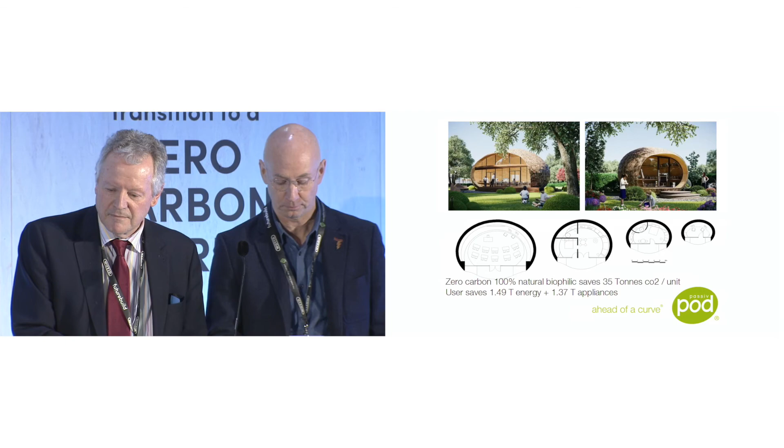Passive Pod will be manufactured off-site with a modular structure inspired by nature's hexagonal beehive shape. The structural modules will be formed from short rectilinear timber components, clad and insulated in the factory.

Automated factory efficiencies reduce waste and improve build quality for rapid delivery and erection. A cradle-to-cradle approach allows all the components to be reused or recycled at the end of their design life.

Laminated timber is fire retardant, more resilient, and lower maintenance than traditional materials, and our fabricators apply ISO standards and have BOPAS accreditation for mortgageability.

Our three markets are driven by demographic growth. Millions of home workers need space which is secure, kiddie-proof, and easy to install. Our retirement population and eco-tourists want high-quality eco-lodges using natural materials, harmonious with rural landscapes.

17,000 schools and colleges have committed in the UK to a national eco-schools programme. They need classrooms which would reduce current carbon dioxide by 30%, and biophilic design improves cognitive abilities in students by 20%. We have a supply chain in place with experienced off-site timber fabricators.

Our 6 multi-use designs use the same modular components. We can scale up via the new off-site MMC fabricators without new factory costs.

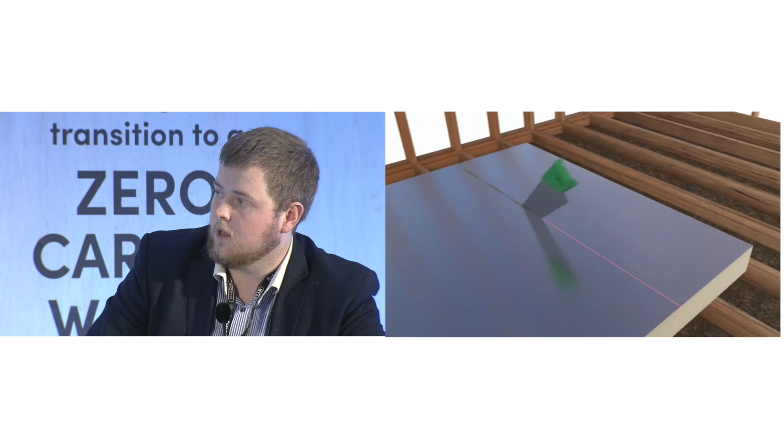So basically, you're going to measure your rafter stud as you typically would, but in this case you're going to cut it 8 to 10 millimeters smaller than the opening. Cut your board as you would, clean it off, then roll your Gapo tape along the cut edge and trim with your scissors — don't run with them while you're using them, health and safety and all that. You're going to do this for all 4 sides, and then that's it. Just strike along the edge.

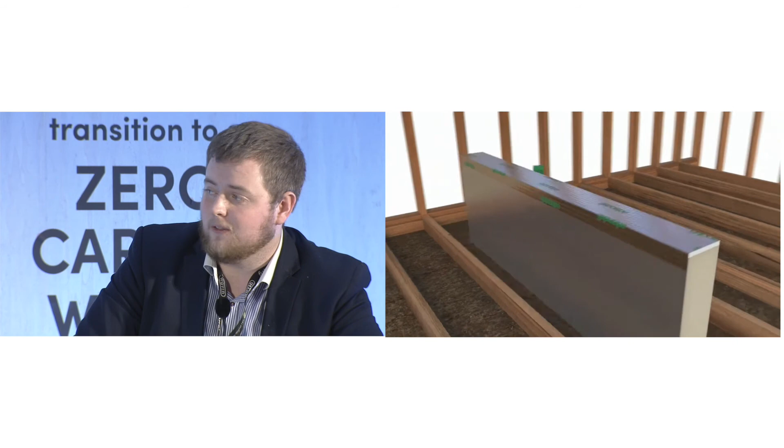Whenever you have this done, you can friction fit it between the rafter or stud, and it is constantly expanding and contracting to fill every micro gap to eradicate any air or heat loss. You do this on your floors, your walls, and your roofs. Now you may say, why would I do this on my floors, walls, and roofs? What's the advantage?

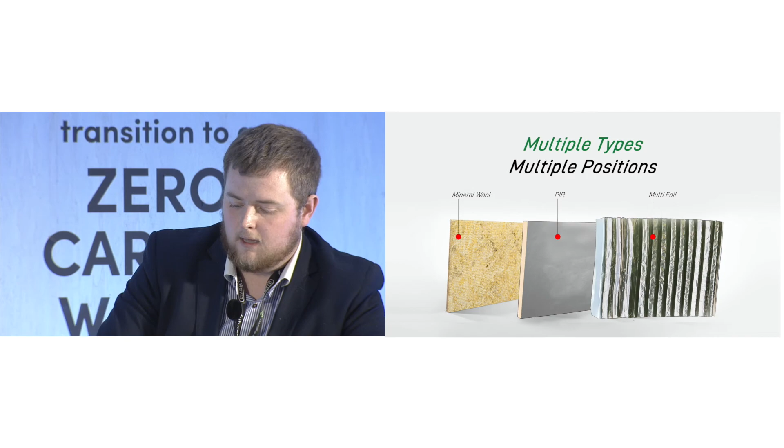In 2012, the BBA started doing what's called an Air Movement and Permeability report on insulation types — basically, a fancy way of saying in-situ tests on insulation. They did it with multiple types in multiple positions: PIR, mineral wool, multifoil, and what they found was that regardless of the insulation used, all insulation types systematically failed.

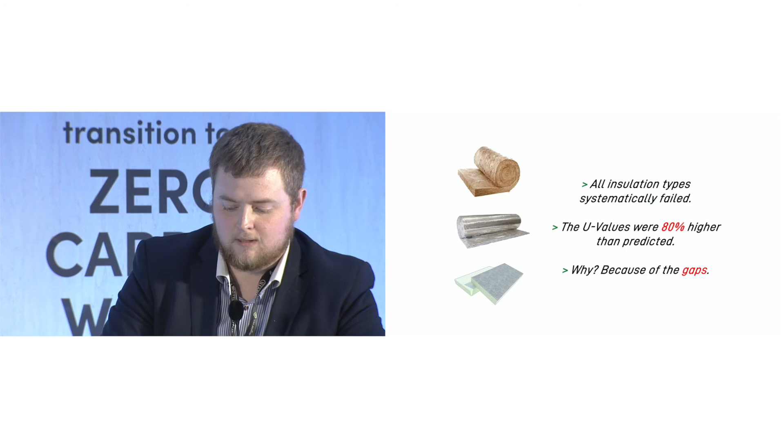The U values were 80% higher on average — 80%. Why? Because of the gaps. Now, whenever I say gaps to anybody, especially a builder, they think a gap is 1 to 5 millimeters. Air and heat, they need gaps so small our human eye can't see it, less than 1 millimeter. And once they find this, they redirect the entire flow and current of air and heat to maximize and take advantage of it.

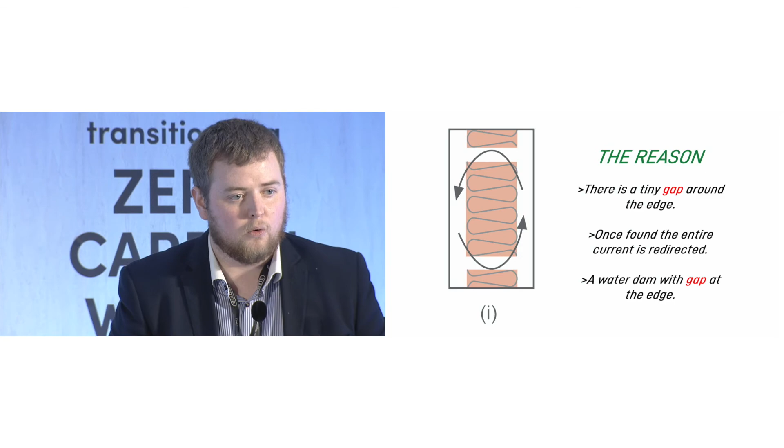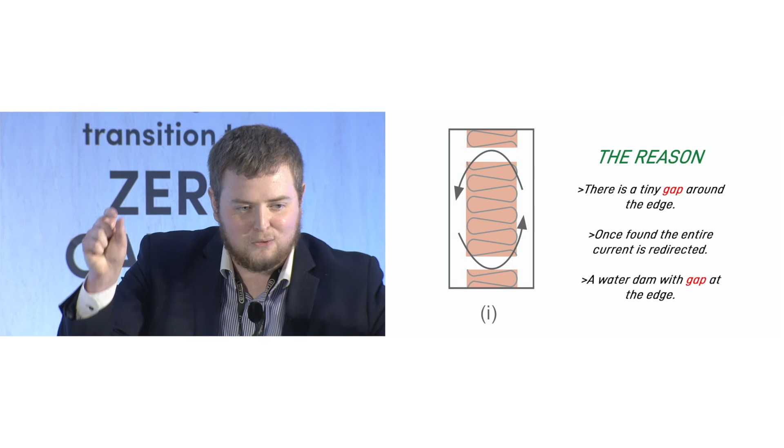The analogy I like to use is: imagine you lived beneath a water dam and the architect and builder said to you, don't worry, there's only the tiniest of tiny gaps around the edge. You wouldn't be long looking on Property Pal for somewhere else to move to.

So this is the end effect of this: the homeowner has to subsidise this 80% rise in U value. They have to take the money out of their pocket and allow it to slip between the gaps. It also has other nasty effects, such as releasing an extra ton of carbon into the air every 10 years, by conservative estimates.

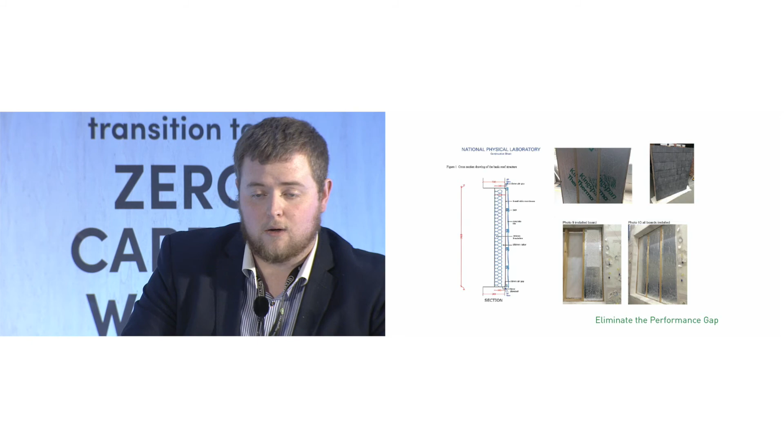So we went back to the BBA and the NPL and said, can we rerun the test — one with, one without our product — to see what impact it would have. Without us, it was the same as they found in 2012: 80% loss, the same as found by other accredited bodies across Europe.

With us, 0% loss. We 100% eradicated the difference between as-designed and as-built, and the performance gap was gone. So the reason this is particularly pertinent is that, as of June 2020, it's no longer 'do I address this issue' — it's 'how do I address this issue.'

There's now an entire annex on insulation gaps, and you have to work towards as-built U values and calculations. You have to swear by your primary energy use per square metre. You have new testing, and you have to take a photograph of every single piece of insulation you're putting in. So it's becoming ridiculously strict.

And there's £480 million worth of PIR sold every year. So a big issue in a big market is a big problem.

If you were to take a small 2-up, 2-down house, it's about £600 to £620 to install Gapo tape. That's £120 to £150 of savings per year. That's 4 years to pay it off, and approximately £4,000 saved over 30 years, which is a 530% yield on investment. The wee joke we like to say is that if Gapo tape was a stockbroker, he'd be the most popular man in London, you know.

Plus, when it comes to time and cost of install, people don't think about how long it actually takes to install insulation. You have to bevel it, you have to counterbat, and do all these things. With us, people tape them and take advantage of the 10 to 20 millimetre margin of error we give, and walk along and slide them in like jigsaw pieces. Then they get rid of all these hidden costs such as timber stop batten, spray foam, and metallic tape. In this particular job, we saved a guy £2,000 over 3 houses.

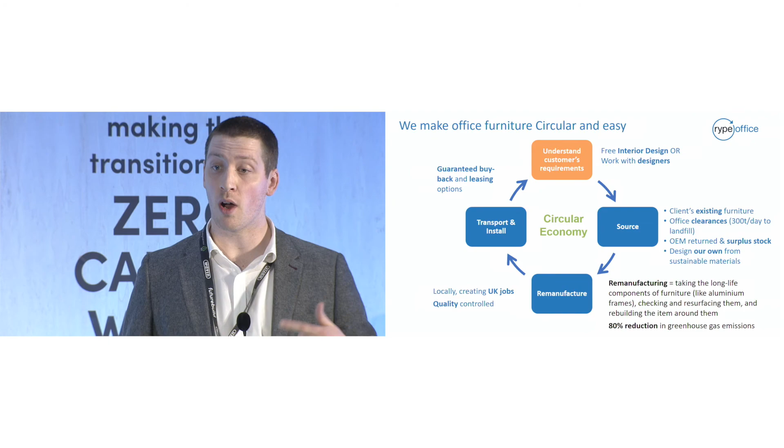We transport and install the furniture ourselves, and we sell it to the client with a guaranteed buyback. Instead of having to pay for it to have it cleared, we will pay you to have it back, because ultimately we know we can rework it and again feed it into our cycles.

So this is the point about cost advantages. When you remanufacture, when you use the circular economy, you have a structural cost advantage. This is because in our industry, one of the main advantages is that you don't have to pay a huge distributor margin. There's also the advantage of not having to pay material costs, because the input to our process is a waste source that people are paying to get rid of.

To summarize, the benefits of circular economy furniture are lower cost, great ergonomics, no cost of disposal, reduced waste to landfill, local employment for long-term unemployed and disabled people, and a real capability to deliver local social value. We also went one step further, because we didn't want to be known as the second-hand furniture guys. We designed furniture from waste materials.

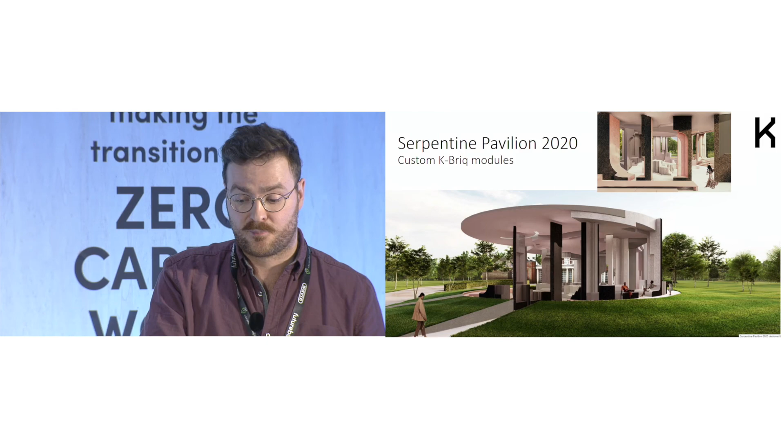Also, exciting news: we've been selected for the Serpentine Pavilion this year, so you'll be able to go and visit a custom K-Briq module project in Hyde Park, which is going to be open from late June.

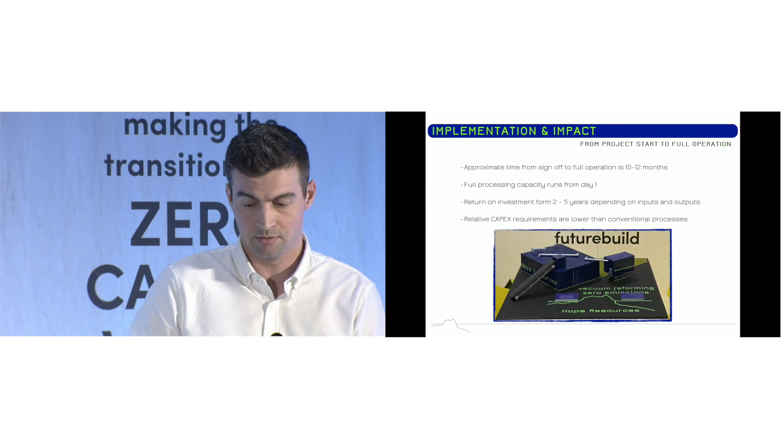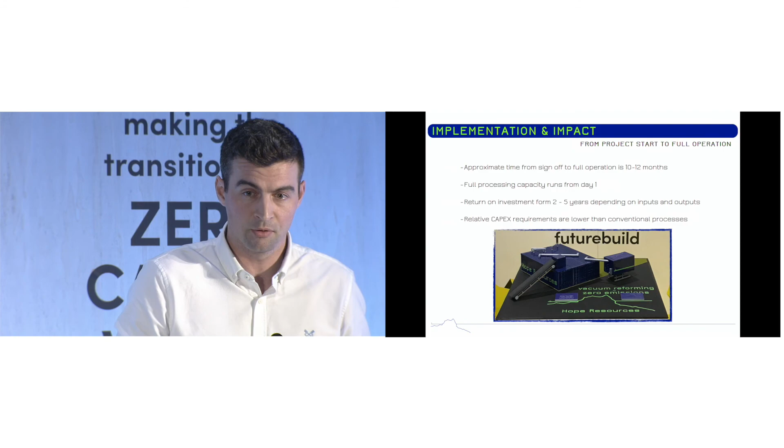Depending on the waste we're processing, the estimated return on investment is between 2 and 5 years. Different wastes come with different gate fees - medical waste, for instance, is very expensive to dispose of, while municipal solid waste is considerably cheaper. The relative capex for our process, pound for pound of tonnage processed compared to conventional technology, is significantly less, making it more economic to put one of our systems in place. And we're not looking to build bigger and bigger units - if we need to handle more waste, we will put a parallel line in that will then process another 25,000 tonnes per annum.

So just to go over the advantages: we process mixed waste, with no segregation required, and we don't mind what's in the waste. We have a lower capex to set up, and our opex is significantly reduced through the method, as it's a highly automated system. It's a modular system - transporting shipping containers is done around the world. We don't need to go bigger, we can keep it simple. And due to the dual revenue of the gate fee of the waste and the sale of the product, we have a very low production cost of our fuel.

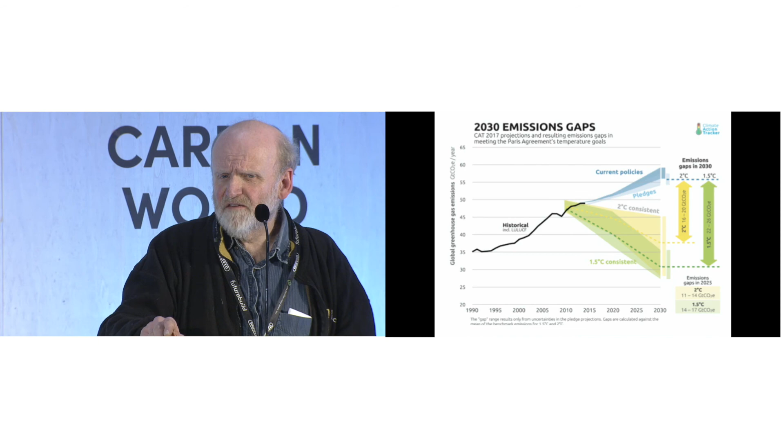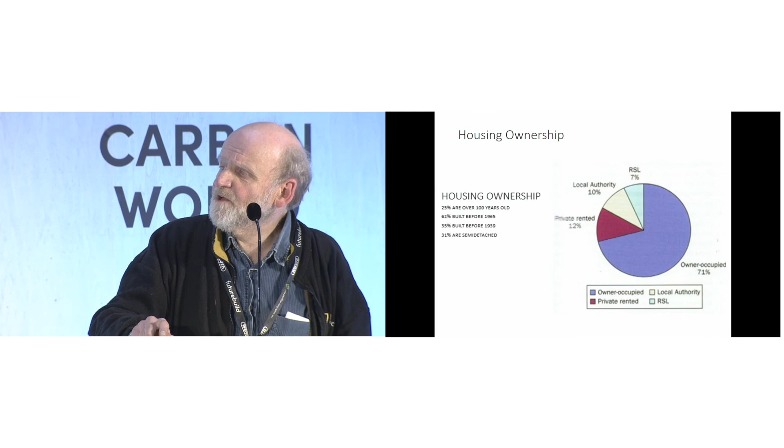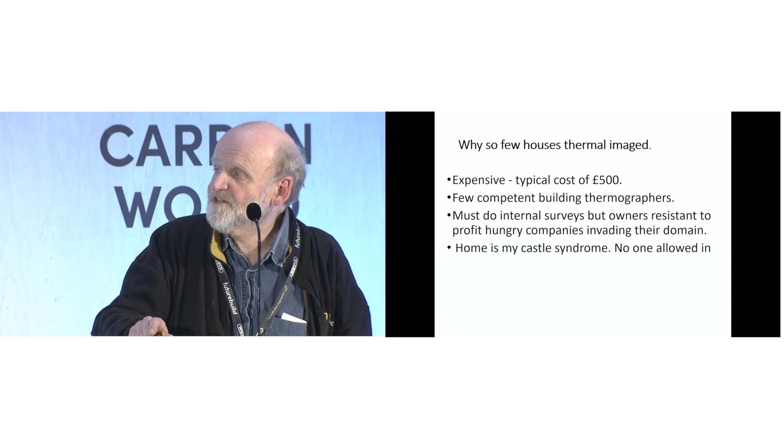So I was wondering how this could be utilized for our buildings, and why actually are so few of our buildings thermally imaged. It comes down to typical costs, too expensive, £500 plus. There are not that many competent thermographers in the UK who understand buildings as well.

It is most vital to do the internal side of buildings. External surveys of a building tell you very little about what's really going on with it. And also, who the hell is going to let people through the door with a video camera to take pictures of all the inside of the house?

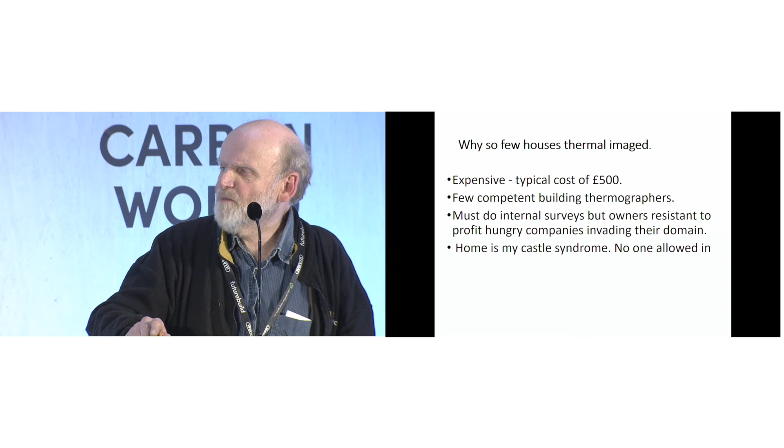There's a resistance from the householders. My home is my castle, no one allowed in. So what was the solution I came up with?

Bearing in mind this is quite a while ago, nearly 10 years ago. You've got to have the kit cheap, under £1,000. The survey's got to be very quick, 2 hours. It's got to be internal. You've got to gather ground truth data.

You've got to make sure that you go into the building where you are invited. And a company is not really the best way to do it. It needs to be coming from the community as a trusted entity.

We put this whole thing together and tried a trial over 3 years in Malvern, supported by a very tiny grant from DEFRA, about £3,000 or £4,000. And we developed a high-speed protocol. I already had cameras on my own, so that wasn't a problem.

We worked with Transition Malvern Hills, generated volunteer hotspotters, designed our own dirt cheap blower door, 150 quid, and we tackled behaviour change as well.

That ran through, and the feedback was amazingly good - 65% had done something within 3 months to their house. From that, we formed a company called Energy Tracers, which was to expand it out sideways out of Malvern.

We came across these people in Bristol who had just started this social enterprise - an ex-TV producer from the BBC, an expert in IT, and a very good expert on community outreach. They had been inspired by this, all the purple and blue areas where people cannot eat and heat the building at the same time.

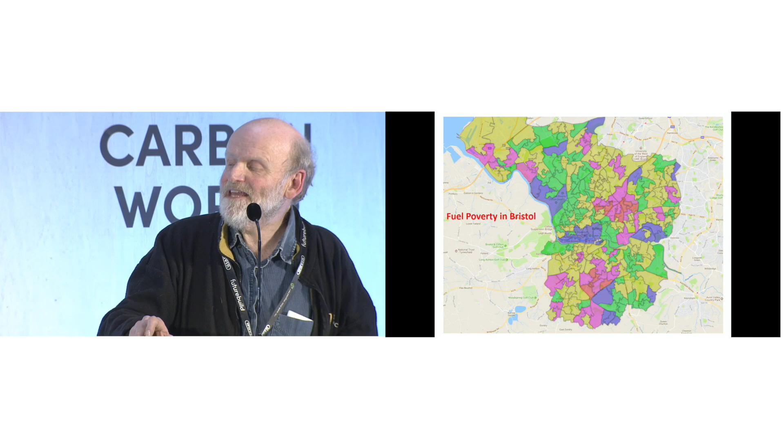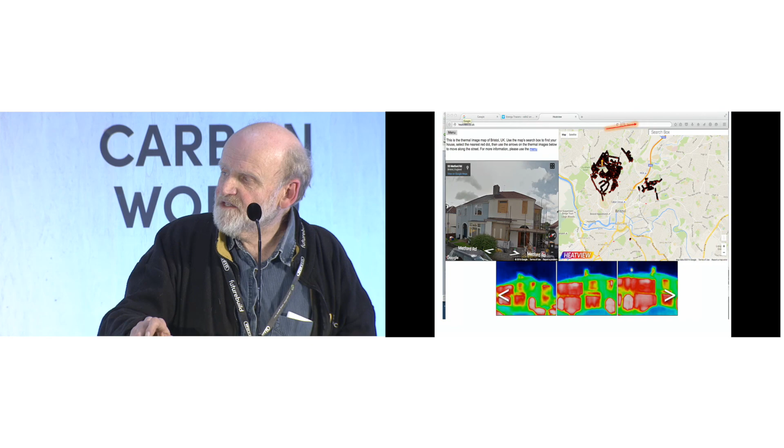And fortunately, simultaneously, FLIR brought out a cheap plug-on thermal camera for an iPhone, which was used initially by us to do external surveys, so we could then have pictures of people's houses from the outside to use in the outreach side to persuade people to grab hold of the idea.

We put it together into a package there. Jeremy and I got involved to do our own special software called HeatView, which is inside it. I introduced my very low-cost blower door, and then we set up a training program, CPD, over 3 days, to train members of the public, housewives even, how to become energy tracers to survey the house.

We ended up, over the last 3 years, training over 30 people to do this. We've done about 400 houses in the Bristol area. That's how it's used - camera looking and a wireless connection to a tablet, so the householder sees it. There is no report written.

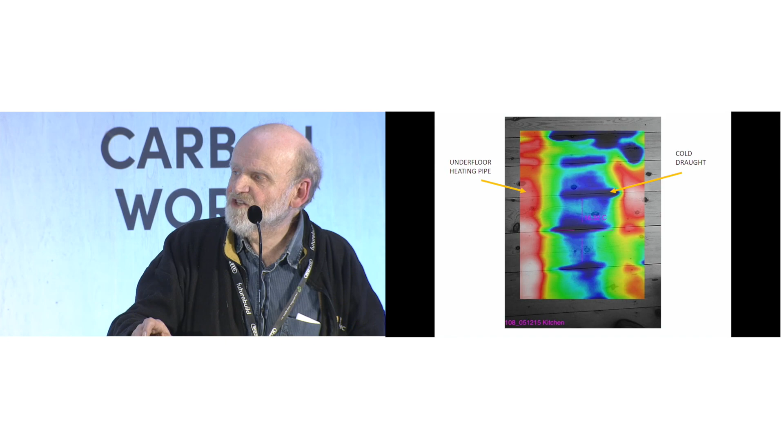Here is a disaster of a conservatory, which has got air leakage around the underfloor heating through the floor.

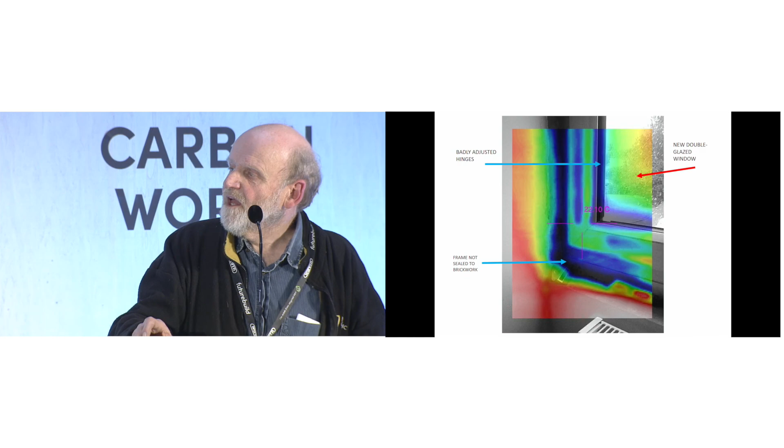Well, I'm only a fraction through this. Is that including my 2 minutes? Because I haven't got the presenter's view with it. I'm going to skip quickly through this so everybody can see what they were going to get.

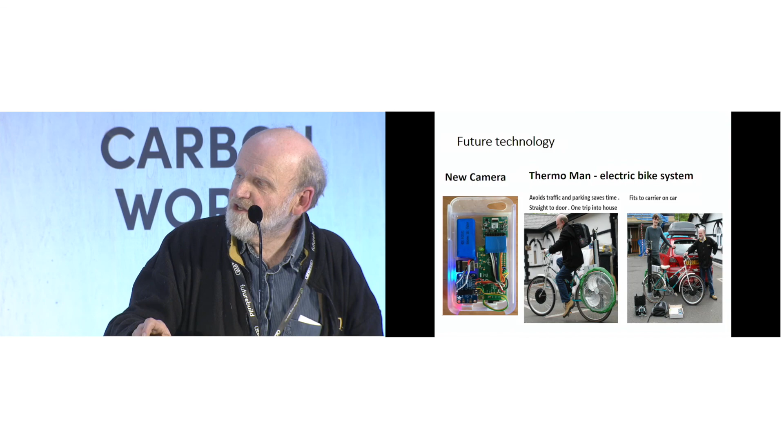New technology, our own camera, Thermoman takes it around, a great deal of future activity. Financials, it's all done on a damn pittance, about 20 grand a year for doing 150 houses. We're looking to expand it with future funding from hundreds of houses per winter period to thousands.

And we're the winner of the Community Energy Most Innovative Energy Saving award. And we've just won a second award this year as well. Thank you.